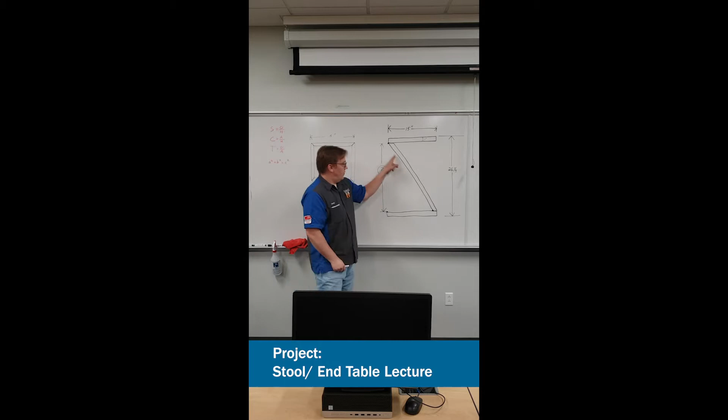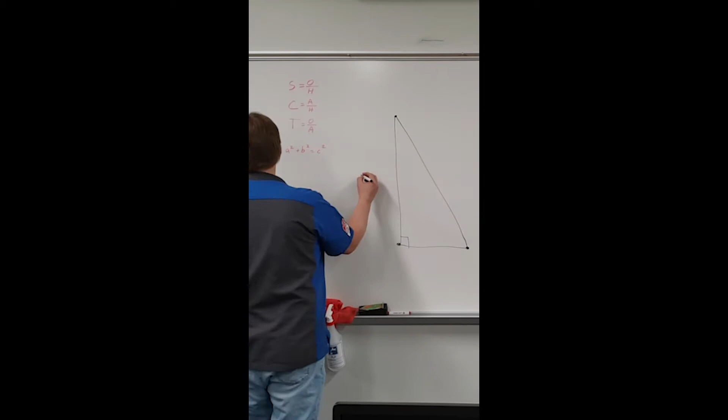We need to figure out the length of the leg. If the overall length, or height, is 26 1/4, we can subtract 2 inches for the top and bottom, and then we know this leg should be 24 1/4 inches.

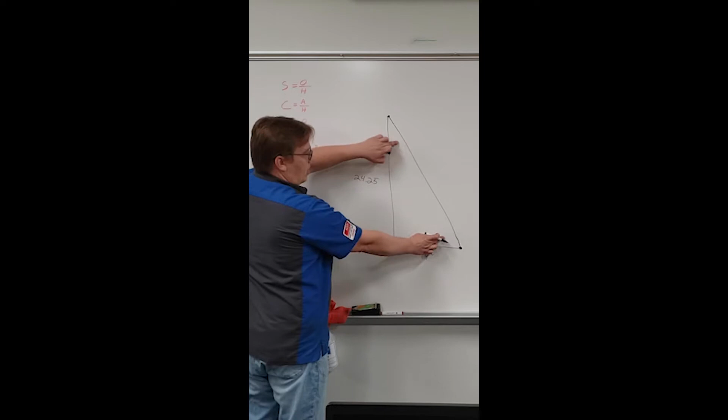We have a right triangle here, so we know this is 90 degrees. We know the sum of both of these angles will add up to 90 degrees. We'll call this a big question mark here, and the hypotenuse of our triangle, that's another big question mark.

This is where we're going to use our SOHCAHTOA method, or the tangent formula would work best for us here, figuring out this first angle.

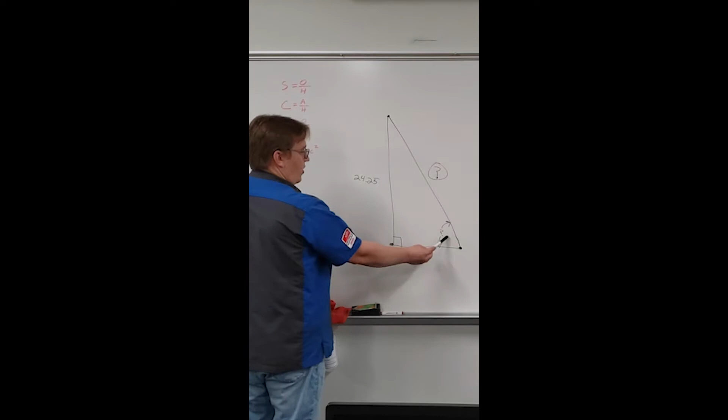So the tangent of this angle would equal the opposite over the adjacent, and we know those two sides. I would just go right to my calculator: approximately 60 degrees.

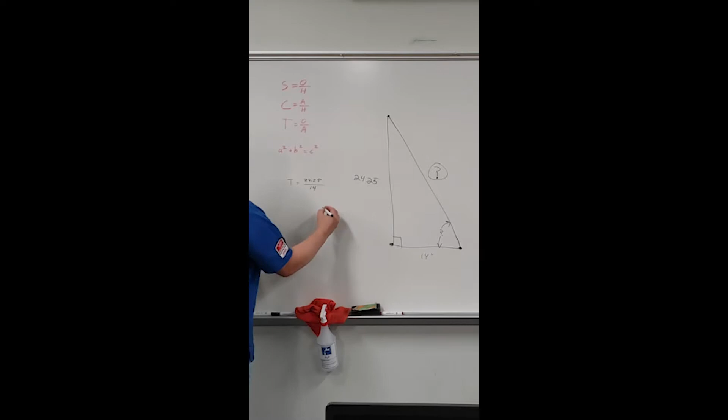We know that the sum of a right triangle is 180 degrees, so we automatically know what this one is. It's going to be 30 degrees.

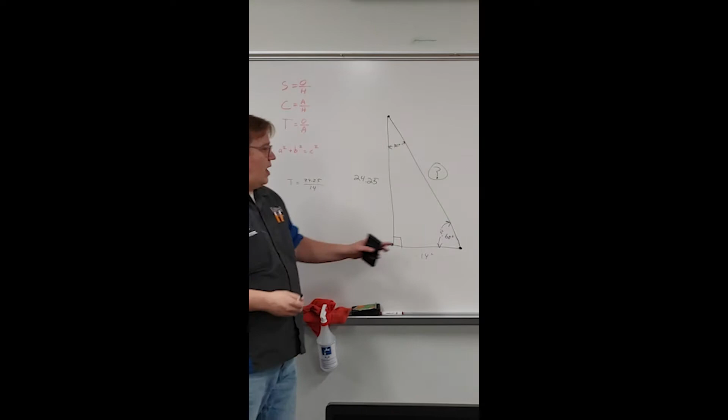So now we know what we can set the saw at, so we get that correct angle. We still need to know the hypotenuse here.

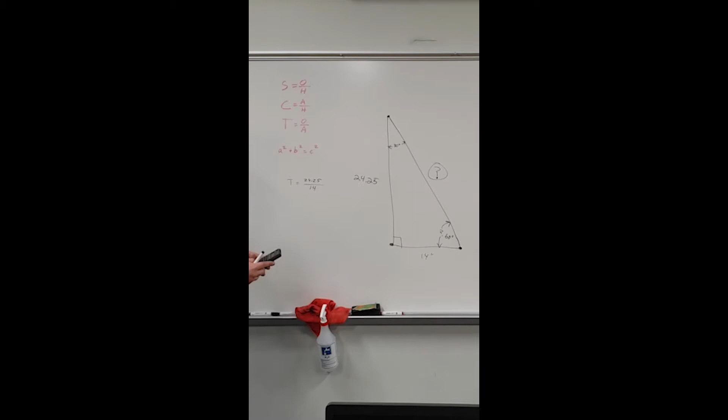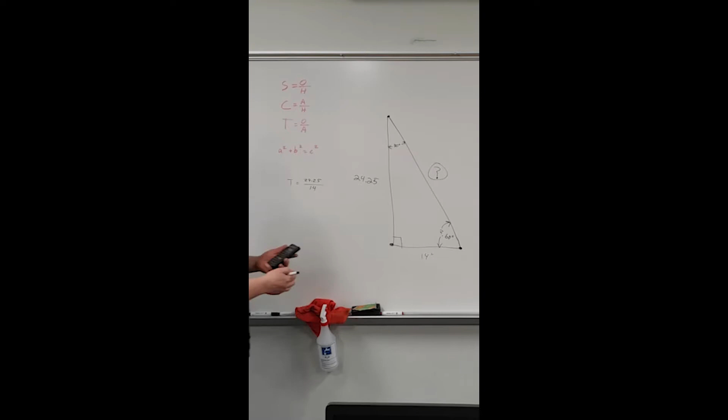A squared plus b squared equals c squared. 14 squared plus 24.25 squared equals, and then take the root of that—it's 28 inches. So the hypotenuse here is 28 inches.

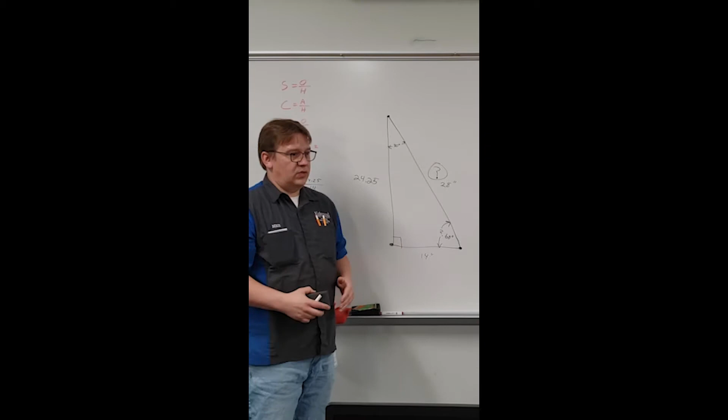So now we know that we're going to saw cut the lengths of those legs at 28 inches, and we're going to set the saw clamp, that solid jaw, to our 60-degree angle using a protractor, and then we can start to cut all the legs.

The top and bottom is going to be easy. We'll just set that at a 45 and cut them to 15-inch lengths. Once we get all the pieces cut, then we can deburr them, clean them up, and get them ready to weld.

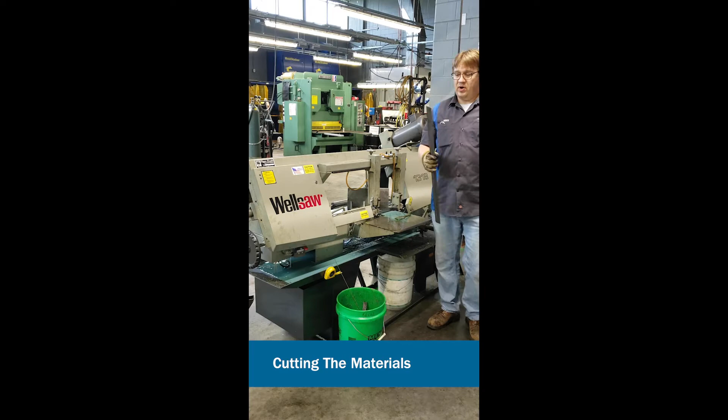Now that we've figured out the proper angles and the proper lengths of the pieces we need, we will use a horizontal bandsaw and cut our individual lengths.

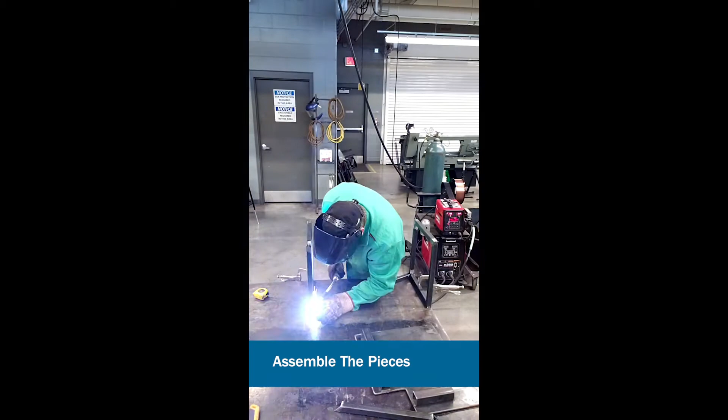To make the tabletop, we're going to use a machine called a shear and cut out an 18-inch by 18-inch square chunk of steel. We'll take it over to the press brake and bend that edge over, and then we'll make our 90-degree bend so it'll look something like that.

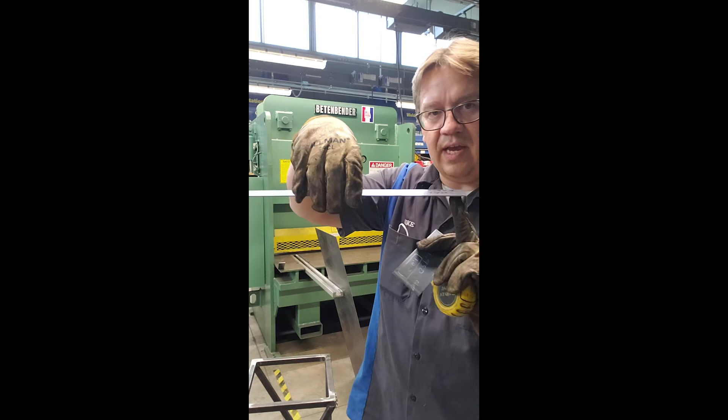It'll be a nice, clean, smooth edge, so we don't have to worry about sharp edges. I've already gone through and calculated what our press brake setup will be to achieve our 15-inch inside space between the legs here, so that when we bend the lid, it'll fit right on there snug, and we can clean it up and weld it on.

So here we go. Let's cut our 18-inch piece.

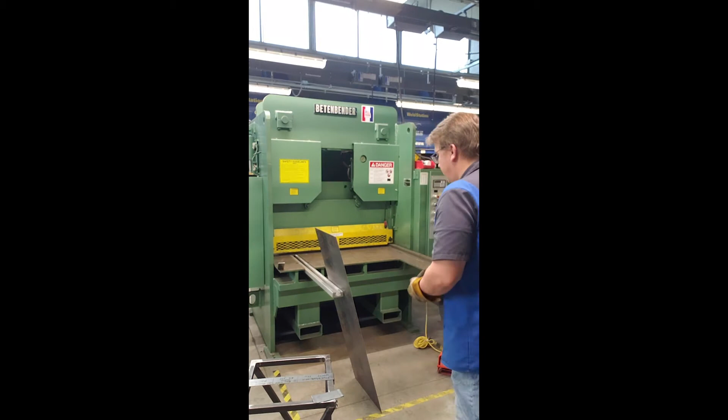This here is basically a giant pair of scissors. It's rated for 3/8 material thickness, 4 foot length.

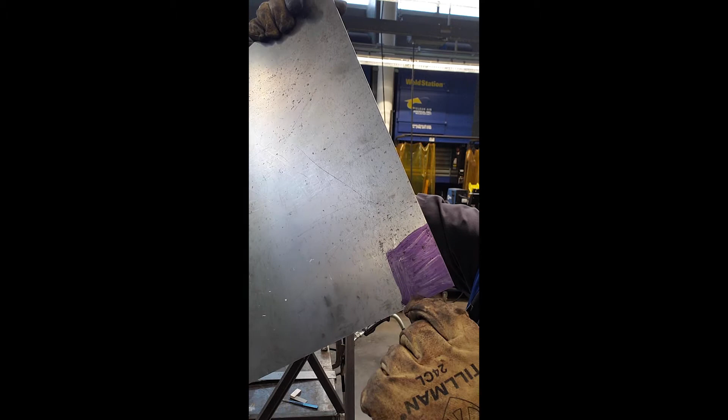I've calculated the dimensions, and we need to go ahead and scribe some lines on there to follow when we use the plasma cutter. So we'll use the plasma cutter and cut near our line on all 4 corners, and then we'll grind and clean them up just a little bit, and then we'll be ready to bend.

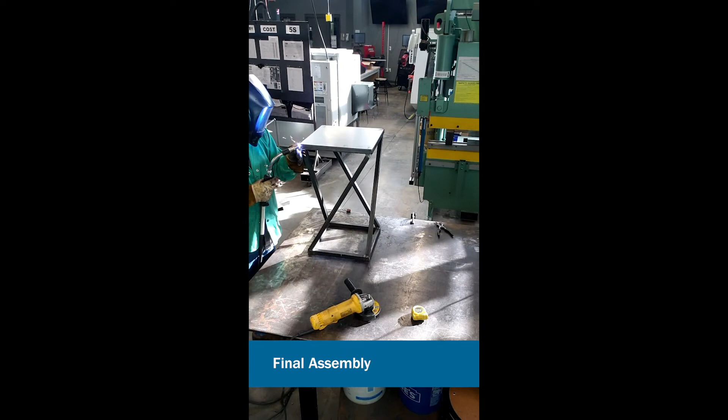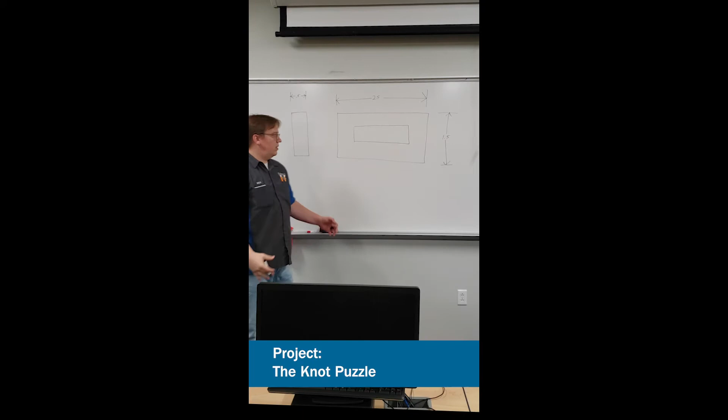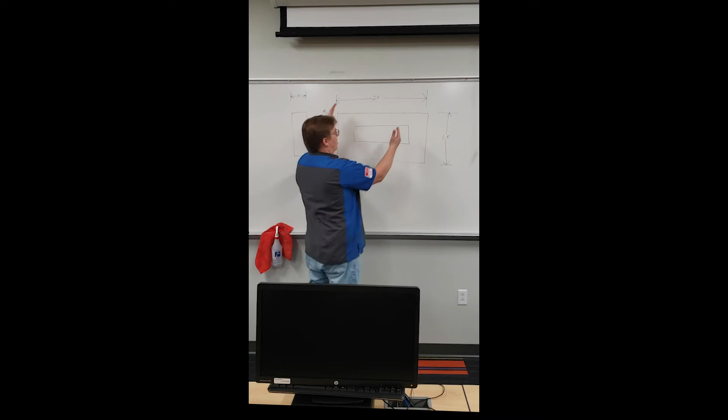In regards to the knot puzzle, we're going to have a 2-inch width, and we're going to have to take a half inch off of that. We will saw cut the 2.5 inch length, probably an eighth inch heavy, so we can take it to the CNC mill and mill the ends off, ending up with a nice square block: 2.5 inch length, 1.5 inch width, by half inch thickness.

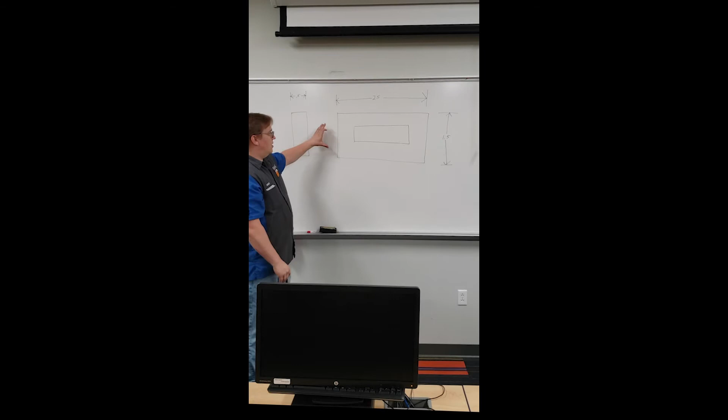Once we get all the blocks squared up, we need to use an end mill and machine a rectangular pocket centered in the rectangle itself. If we were to machine this with a 3/16 end mill, that would leave a slight radius, so it wouldn't have a nice inside square corner, so we offset a drilled hole in each corner. That just takes the sharp corner away, leaving plenty of room for the 1.5 inch width of another rectangle to slide into this rectangular pocket.

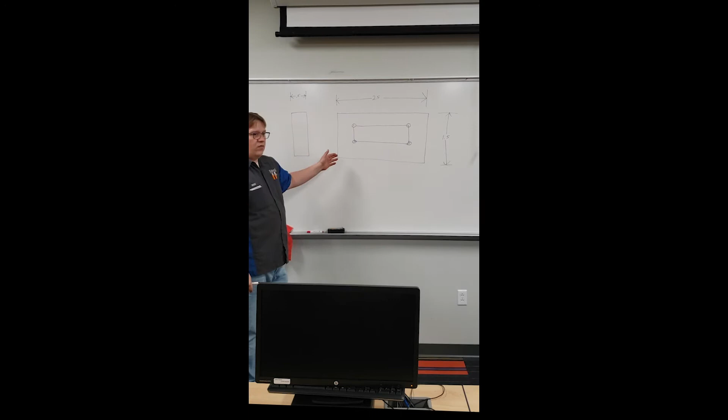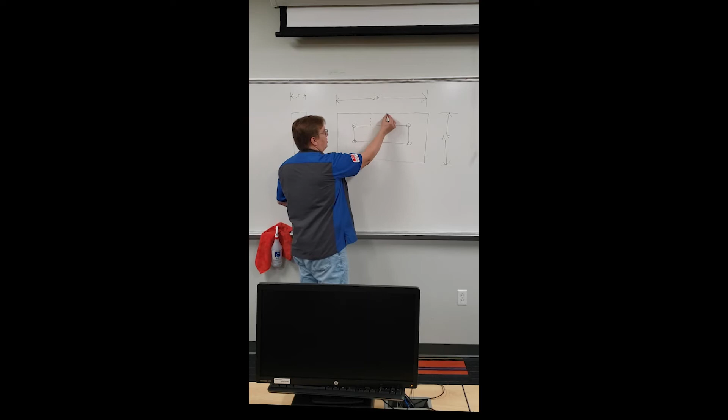There's going to be multiple operations here. First, we saw cut the length a little heavy, and then take it over to the mill and square it up. We'll drill 4 corners and mill out that rectangular pocket, and then we'll use a spot drill and go along the edges to put a little chamfer to break that sharp edge so we don't have to do so much filing. Then we stand one up at a time and mill out what I'll call the C shape. Once that's all done, we can do the final deburring and assemble it.

So here's our half inch thick, 2 inch wide aluminum bar stock.

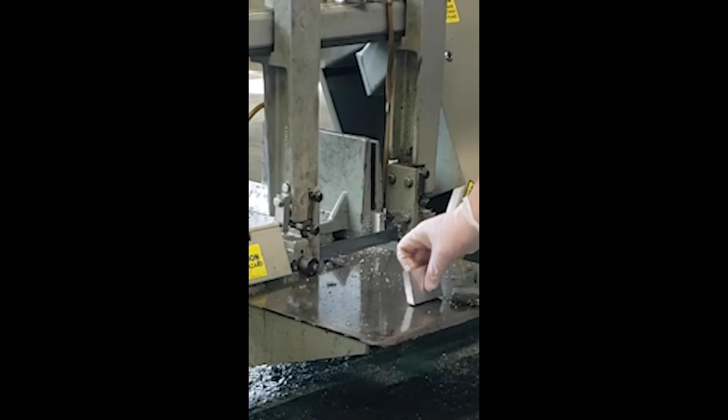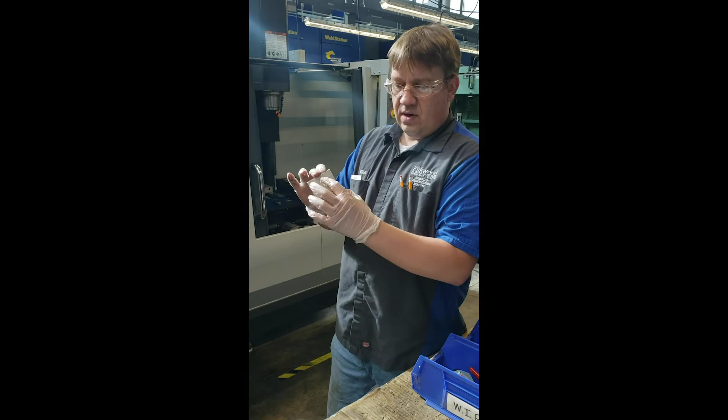Now that we have all these pieces cut, we'll use this giant face mill - it's an insert cutter - and put it in the spindle of the mill. I'll sandwich 2 of these in the vise, bringing it to 1.5 inches, then put it in the vise lengthwise and come by with a half inch end mill, and that'll shave down one end. We'll flip it and take the other end down to that 2.5 inch length.

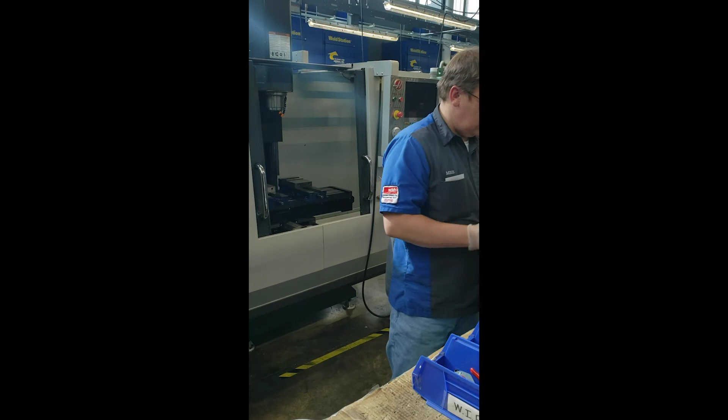Once everything's squared up, we'll use a series of tools: a small .140 drill to drill the corners, and a smaller end mill, a 3/16 4-flute end mill, to go in there and make that rectangular pocket. And then this was the spot drill I was talking about - what this does is come by and deburr, putting a nice little 45-degree chamfer on there to help reduce some of the filing we'll have to do at the end.

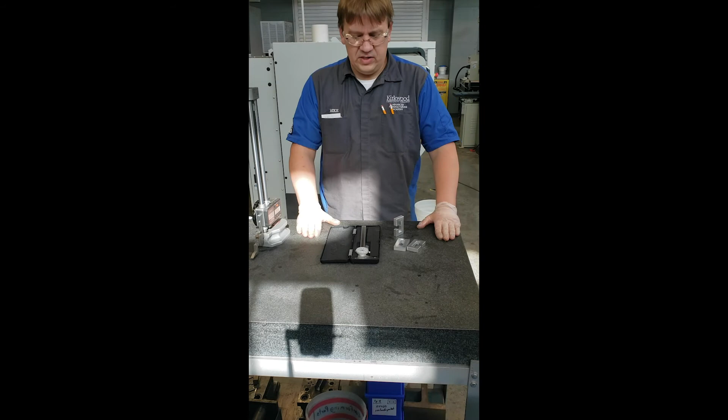Okay, over here I'm at the inspection table. As we're running the rectangle pockets, it's very important that we keep track of our quality and do a periodic inspection. We know we started out with 1.5 inches width, 2.5 length, half inch thickness. Instead of just a plain 1.5 inches by half inch, we gave it a little tolerance, so we're going to mill the pocket slightly bigger - we'll call it 1.510 wide for the width of that pocket. It's very important that that is centered.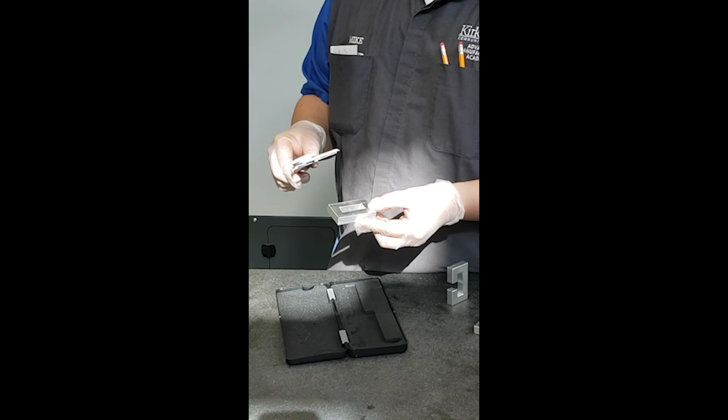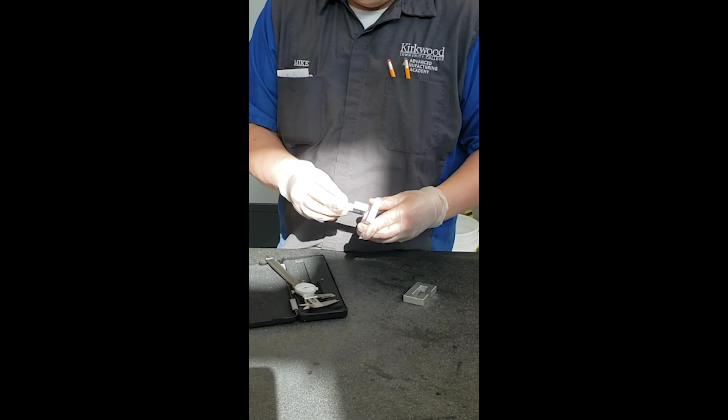So we would go by and make sure this was half inch or less. If we come into one that's extremely off center, we're going to want to take that out of the mix. Otherwise, we'll get some puzzles that don't quite go together properly. Too tight a tolerance or too loose a tolerance would be a problem with assembly, and we want to make sure we're making quality products.

By the way, did you guys know where they make substandard parts that are not good quality? I believe it's called the Satisfactory.